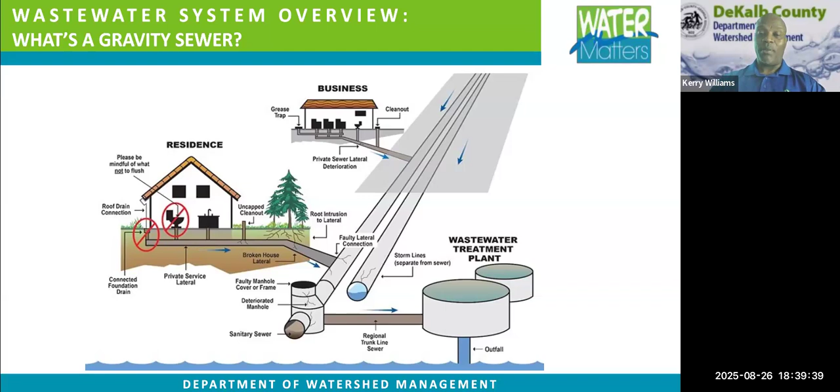From there, you will have the laterals, the little thing you see in your yard with the little cap that connects to the sewer. If that little cap, please don't take the lawnmower and hit it. That gets water into our system, which we call I&I, and we're treating rainwater, and it's expensive to do that. I advise you don't put grease in there, and don't put disposable wipes in there because they do not degrade, and they end up at the wastewater plant because they don't degrade like toilet paper does.

So why is DeKalb County replacing or repairing? We're not doing neither one in this case. We are actually adding a sewer system to this neighborhood that is predominantly on septic tank. That's why we call this a septic to sewer. In some cases we do replace, but in this case, this is septic to sewer. So we are adding to the network a brand new section of sewer lines to the system.

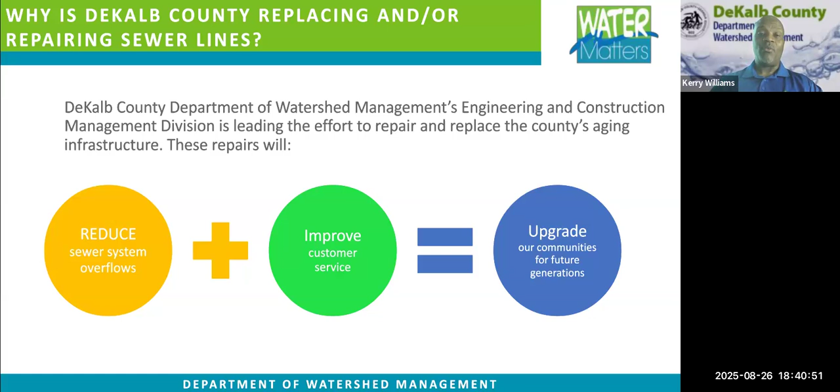You may currently have a septic tank. You're not required through this to connect to the sewer, but in case your septic tank fails, I can tell you now, if there's public sewer in front of your house, the health department will not allow you to redo your septic tank if there's public sewer there. They will require you to connect to public sewer if it's available in front of you. And this is great because if you're selling your house, it's a benefit to have public sewer running in front of your house, knowing that if your septic tank drain field fails, you do have an option right there in front of you.

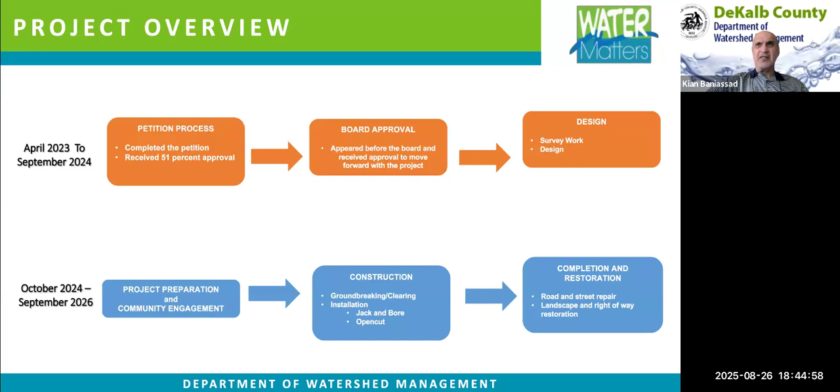As part of this project, the planned work includes about 2,300 linear feet of 8-inch pipe. We also will install 12 new manholes, and we are using conventional open cut and jack and bore methods for this project.

There are about 30 homes that would be affected, and we would provide a stub out for the new sewer connections. The property owners would be responsible to hire their own contractors or plumbers to connect to those stub outs. At this point, I invite Mr. Mathis to talk to you about the construction phase.

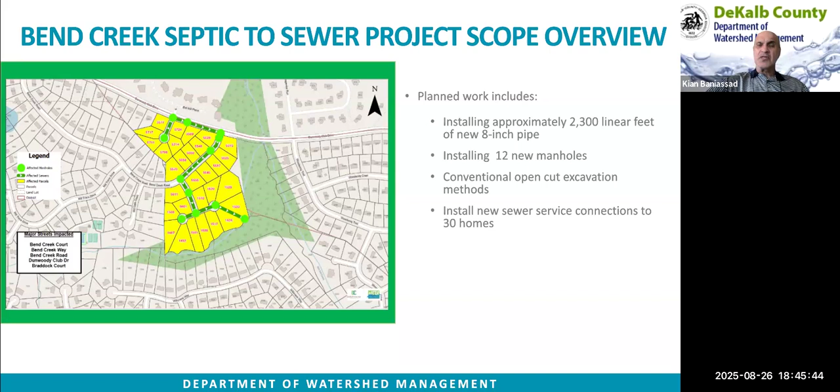Thank you. Danny, if you're speaking, you're on mute. Sorry about that. Hello again. My name is Danny Mathis. I'm the construction project manager for the Bend Creek project, septic to sewer.

Bend Creek septic to sewer construction overview. Boots on the ground is my inspection team. We'll be responsible for all construction activity. We ensure that erosion control and sedimentation controls are in place prior to starting digging. We'll ensure proper installation of pipes. We'll handle customer complaints, coordinate with other municipalities, and ensure safety measures are taken throughout the project.

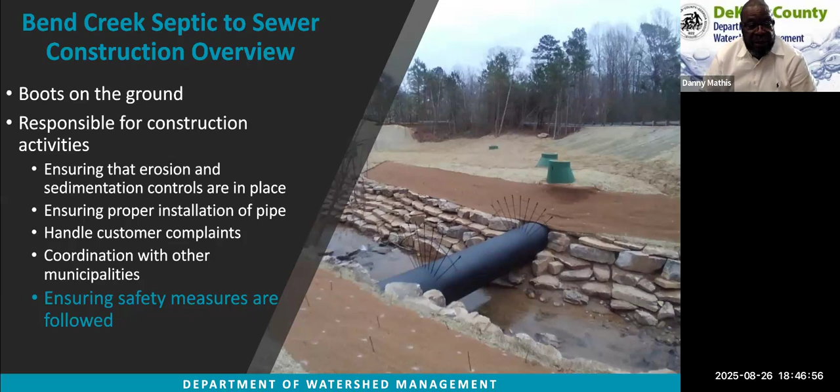Methods of construction: we're going to have two methods, jack and bore and open cut trench excavation. With the jack and bore, we'll have to dig a receiving pit and a pushing pit to pull the pipe through without disturbing the top of the ground, so we'll be doing some trenchless digging. The open cut is just a traditional method of pipeline construction, repair, or replacement.

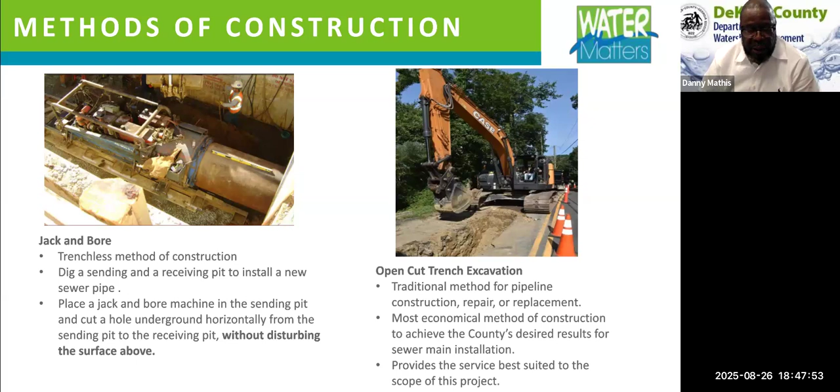Again, you'll hear from Ms. Cassandra Marshall. Thank you, Danny. I will now address community concerns and what you should expect.

First, there are going to be inconveniences with the pipe going down the center of the road. We will have some lane closures. Please be aware, though, even though you're going to have inconveniences, these are short-term interruptions that will provide long-term results for you and your community. Once we replace the pipe in the area, these improvements should last a minimum of 70+ years.

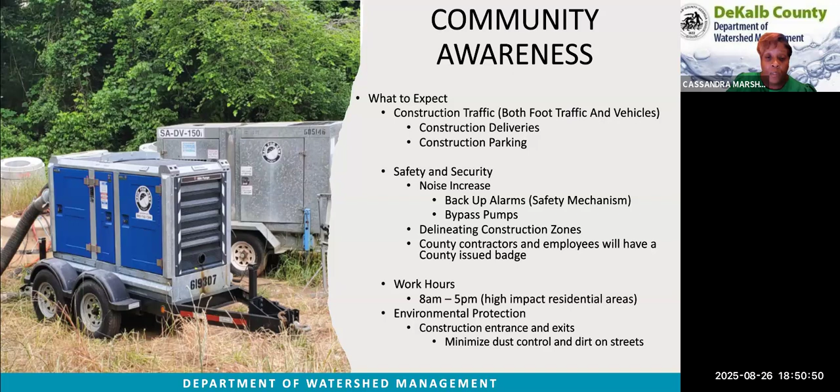Next up, you will hear from the Public Relations Manager, Ms. Alicia Penny. Thank you, Cassandra, and good evening, everyone. My name is Alicia Penny, and I'm the Public Relations Manager. And tonight, I will be sharing with you how we will communicate with you and partner with you throughout this project.

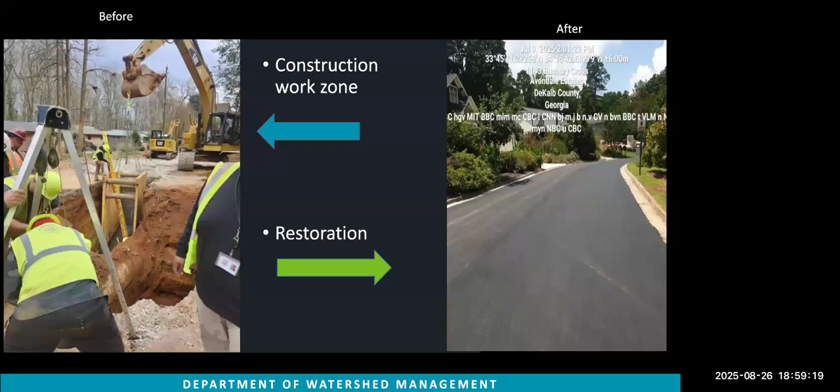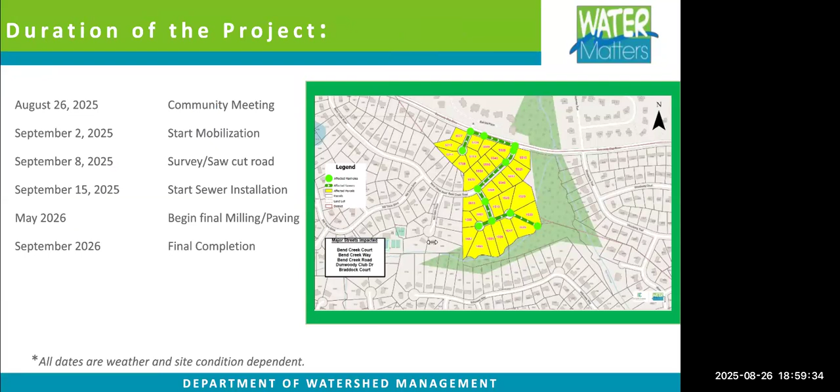Do you want to speak on this, Danny, or I can just explain why we have these long durations. I guess I would put it in perspective to our Kahili project. You never know, in virgin ground where we're putting in pipe deep, we could hit rock, so these are estimated completion times. It could happen quicker if the soils are okay and it's not rock and we had to hammer, or maybe even blast, it could happen quicker, 6 to 8 months. But we're projecting a long completion time, just in case things happen, weather delays, site conditions, any of that. So a year should probably be the max. I would say 6 to 8 months is probably the general range of completing the project.

Do we have any other questions? No other questions at the moment. There are no other questions.